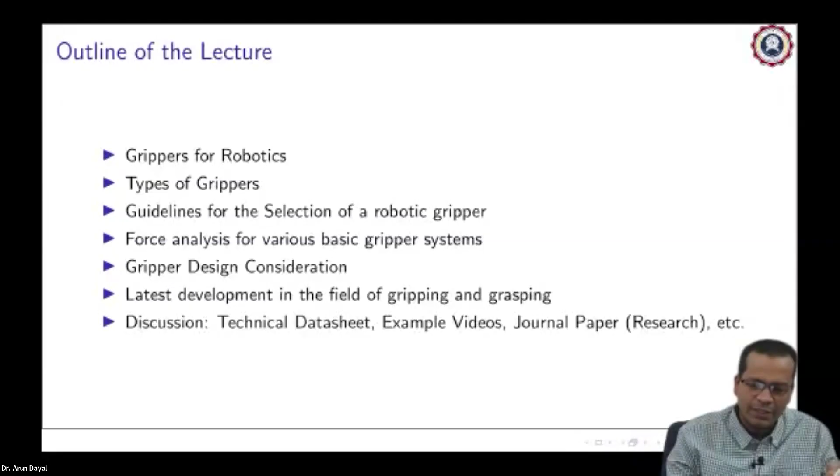Two things are there, we'll come to know very soon. Discussion on technical data sheets, I'll show some example videos, quite a lot of videos rather, and journal papers, a few research papers I'll discuss, so as to help new researchers who want to venture into this kind of robotics.

So as such, what is a gripper? A gripper is a device that enables holding an object that needs to be manipulated. Manipulated here means you want to transfer it from one place to another.

So that is the reason you want to hold it first of all, so that it can be manipulated. So how to hold it? Just like our arm, you have a dexterous gripper at the end, your palm, your fingers, that help you to grip something, to hold something. So your arm terminates with the end effector tool that is commonly known as gripper if it is used to hold an object. So we'll quickly start with a small video here.

So before that, yes, yeah, just a sec.

So you just watch this video, what it is trying to say. This is a video by one of the manufacturers, that is SMC, a Japanese company. In India also it manufactures grippers, a few of its types, in Noida. So just watch this video, that is for a few minutes, yes, two or three minutes.

You see it is a grip, ensures precision and a tight grip, high repeatability gripping force. What it is basically, it is a two-fingered gripper with repeatability 0.01 mm.

So just look at the key terms here. Before we could elaborate upon how to go for gripper theoretically, just watch this video carefully. This is the first video I would like to show because it covers widely all various types of gripper. So that is the reason, what precision means here, what is repeatability here. Repeatability is 0.01 mm. It is not the robot's end effector repeatability.

What is repeatability? Anyone, if you can stress upon that, what is repeatability here? Anyone? It should be two-way communication, as I told you.

No? Okay, I'll elaborate. So let's say if it is an end effector arm, what happens? Every time you touch upon something, you go repeatedly, multiple visits to the same site. Every time you reach there with some perturbations. So maximum amount of perturbations from the commanded position. So the sphere which contains all the dots which you have touched upon for a given commanded position, the maximum size that can contain all the dots is its repeatability.

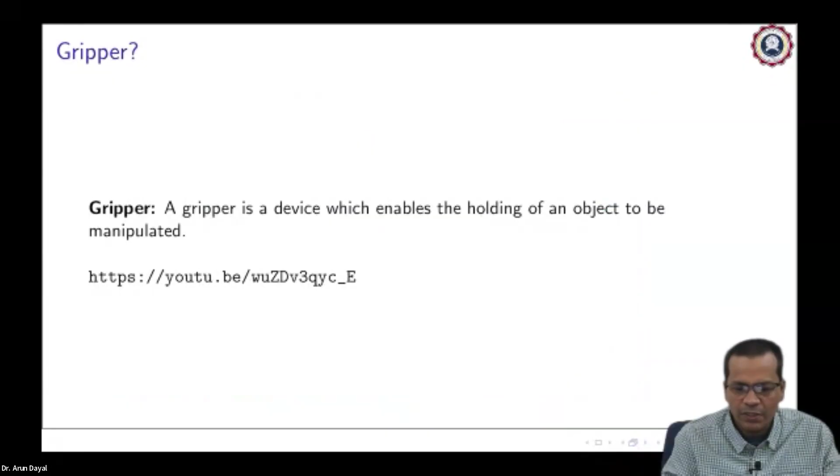Let me stress upon this point. If it is a circular object of this kind, you can have a gripper of this shape, with some radius for this surface. This surface will have some kind of radius, and this has a radius also. This is R1, this is R2. If there is a bit of difference between them, there has to be some, but that should ensure maximum amount of gripping surface so as to avoid any kind of slipping.

Got it? So it is a cylindrical cut. So if the radius is of multiple sizes, you have cylinders of this size, cylinders of that size, so you have multiple size cylinders.

In that case, what we should do here, hope you are here with me, so continue listening. Create noise, I like noise also, and that makes me feel that you are alive.

So this is a cylindrical surface. It can establish a good amount of surface contact without slipping. But this could be a wedge kind of gripper on both sides. What would be the benefit of this?

Now you can hold cylinders of multiple sizes. Because both wedges are of the same type and size, it will be self-centered also. When you approach from both sides equally, upon full closure on the cylindrical surface, the center line will not vary.

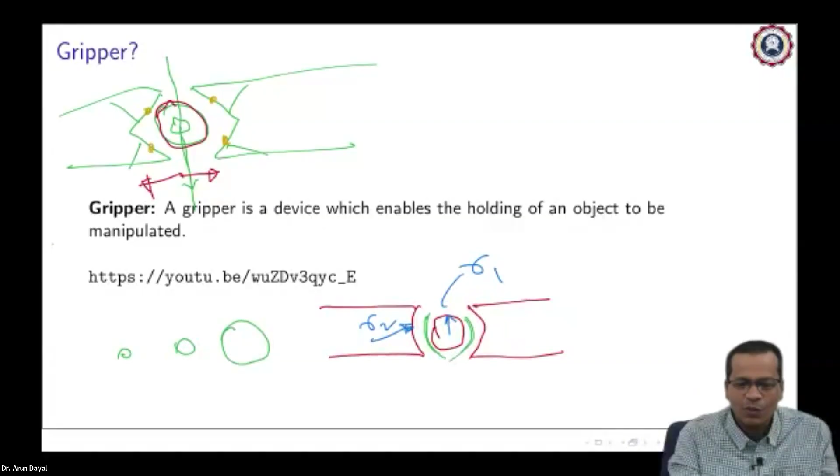Is it okay to have 4-point contact for a circle? What would be the problem having this kind of 4-point contact? A circle can be defined with just 3 points. The fourth one is redundant. So if it is not precisely placed, it goes off the surface and creates some spacing.

There will be some space left over here. This will cause movement of your cylinder. So 4-point contact is redundant, but having a wedge on both sides ensures it is self-centered, meaning the axis will not shift. Let me wipe off a bit to make some space. So that is the problem with 4-finger, 4-point contact, but it ensures self-centering.

Now what else could be done? One of the fingers can be flat, the other one can be like this. So upon holding any cylindrical object, it will create 3-point contact: one here, one here, one here. This will precisely hold a cylinder.

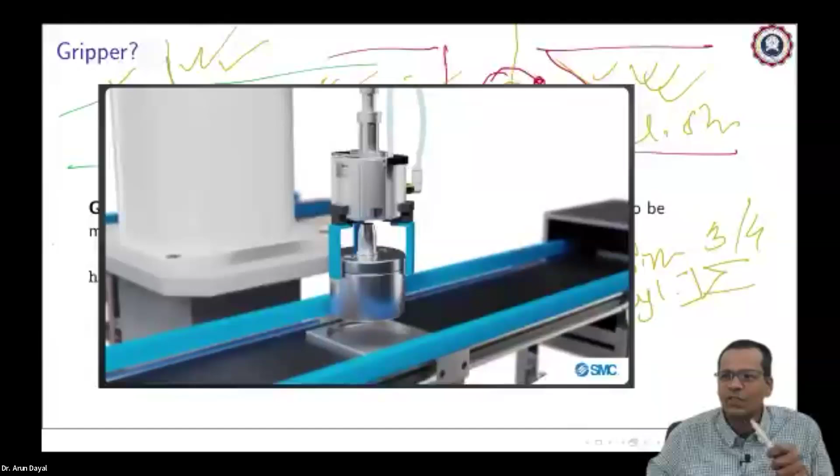So a 3 fingered gripper ensures self centering. If you require a strictly self centering grasp, you use this kind of gripping, that is 3 fingered gripping. So this ensures that.

So you have various kinds, right. Common use, this surface with flat fingered gripper with 2 point, 3 point, 4 point, or maybe rubbery surface or a cylindrical surface, 2 point gripper.

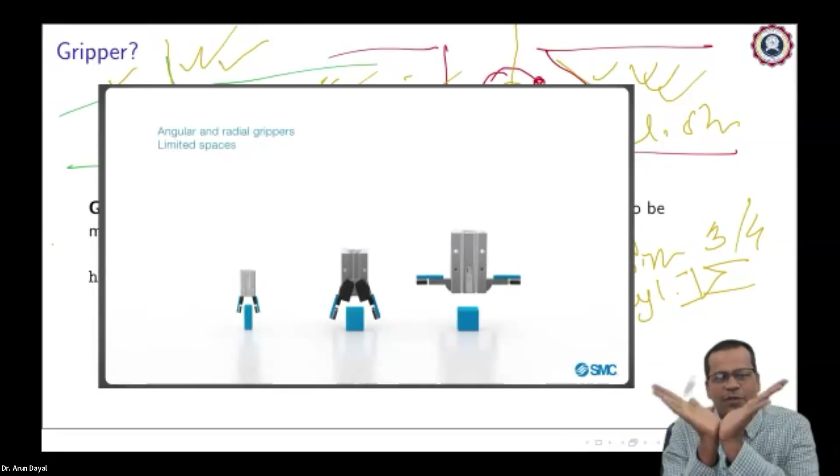And then you have an angular gripper for limited space. Normally, if it is a fork kind of gripper, you have long prongs, just like a tongue depressor which doctors or surgeons have. You need a wide, long space to hold any object. In case you don't have much space for that, you can have this fin kind, and grab it like this. So this is angular gripper or radial gripper for limited space, which can grip like this.

You got it? What it did? I have just repeated it.

Now another type, that is magnetic gripper. Obviously this is only valid for ferromagnetic pieces. So uneven surface or any kind of surface can be held firmly.

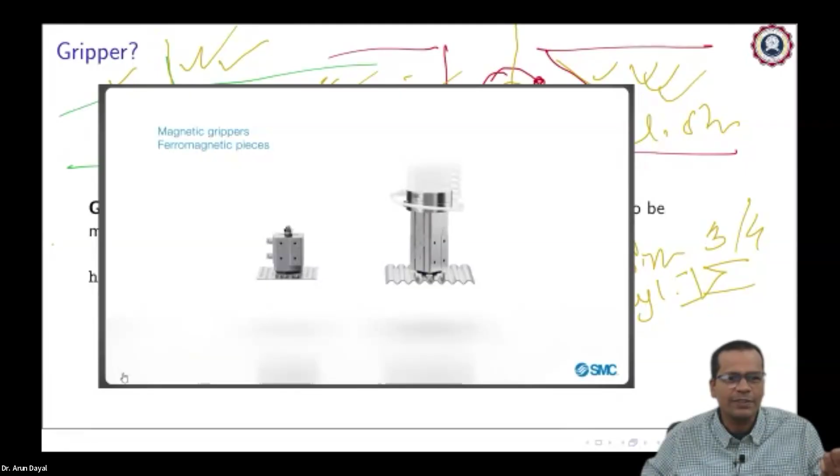Electromagnetic gripper, this is quite obvious. Adapt to special environments, right? Some special kind of gripper, dust and water resistance. So this is also to be considered. We'll discuss in detail how much ingress protection in terms of dust and water it should allow.

There are grippers for clean rooms. What is a clean room? Where ICs chips are assembled, even for space station precise assembly spaces, you need a clean room. It is not clean literally, it is actually the number of particles in 1 foot cube. It can be class 100, it can be class 1000 clean room. So that is mostly used for the electronic industry, right? That is clean room. You can Google around and find it out. It is for that reason it cannot spread any kind of particle in the air. It is very sensitive to that. So it is used in electronic handling.

There are grippers for special purposes like battery manufacturing, which is free of copper, nickel and zinc.

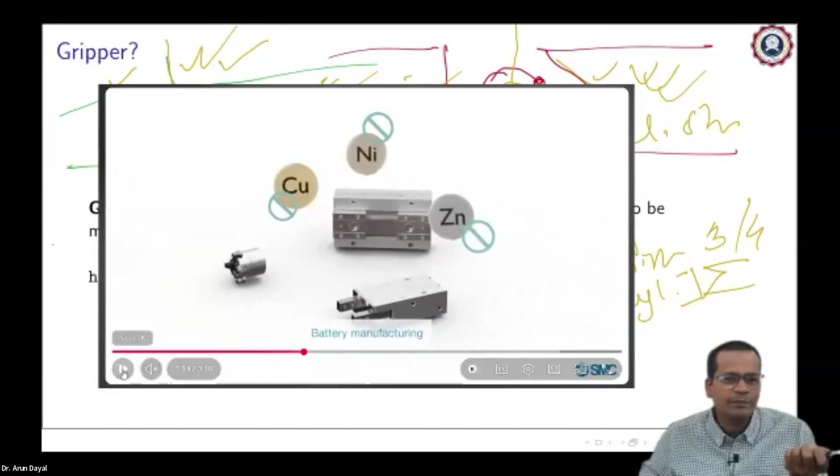Chip handling, you see, pick and place. This is a typical pick and place task. This is known as end of arm tooling.

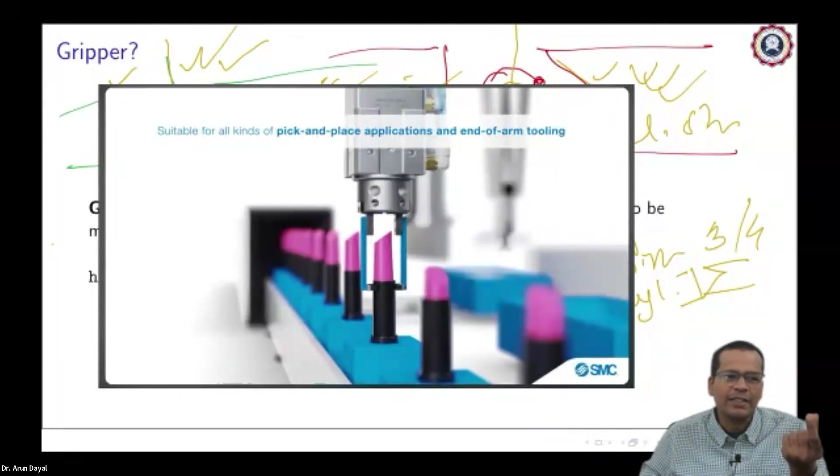These are grippers which can hold from both sides as well as rotate about its axis. That means it has 2 degrees of freedom. First is the gripping direction, lateral, both fingers are not independent. Although it looks like 2 independent degrees of freedom on each finger, they are actually clubbed together, so that is 1 degree of freedom. The other is axial degree of freedom, axis of rotation, giving 2 degrees of freedom. You see, it can rotate, it can hold.

This can hold from outside. It looks like a pneumatic gripper. I'll tell you what is there inside later on.

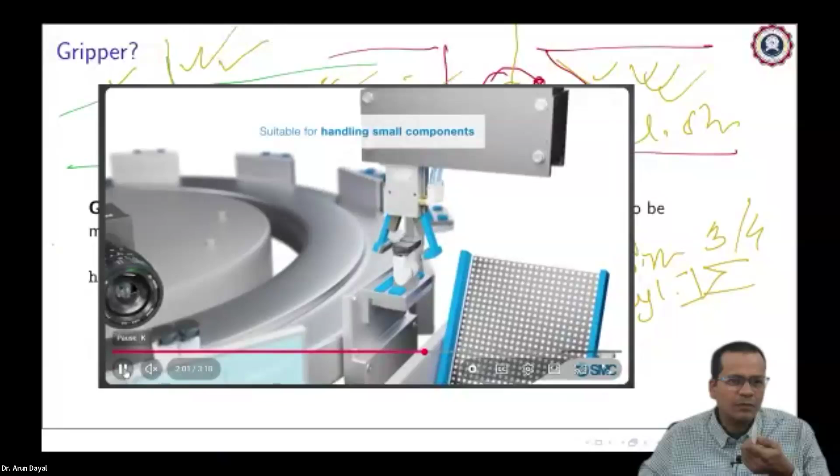This is a multiple fingered gripper which can hold a pair of things together. Angular gripper, parallel gripper, you could see different usages of that.

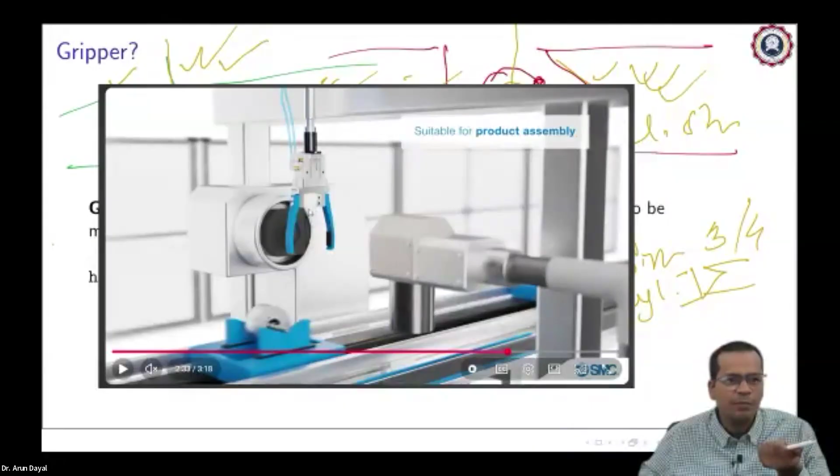All the gripper fingers are specially designed, you see. You can have the same robot arm with multiple types of grippers. You saw in the next one, it rotates and a different type of finger comes forward.

Tool changer, actually it is changing the tool. So if you go to the assembly line, you will find multiple types of grippers on the same assembly line.

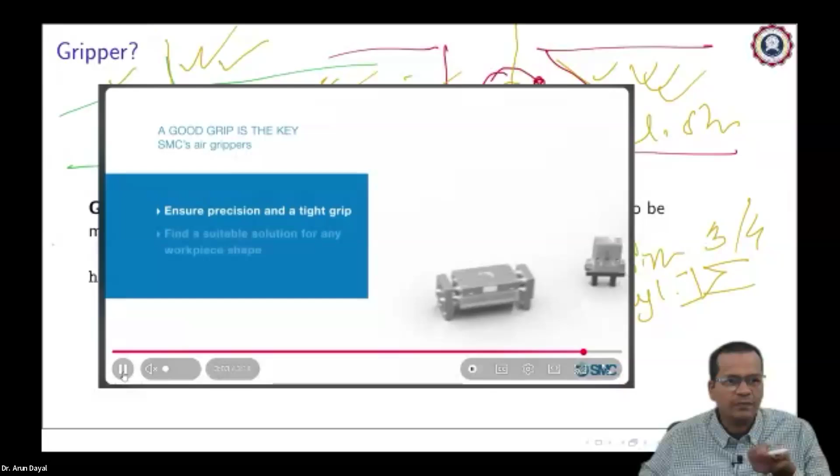So you saw many examples. Let us stop this video here and continue further. Hope you got the idea of what we are going to discuss now. So now, a parallel gripper, based on how different types are defined here, based on the primary motion of the gripper jaw. Let me turn on one small example once again.

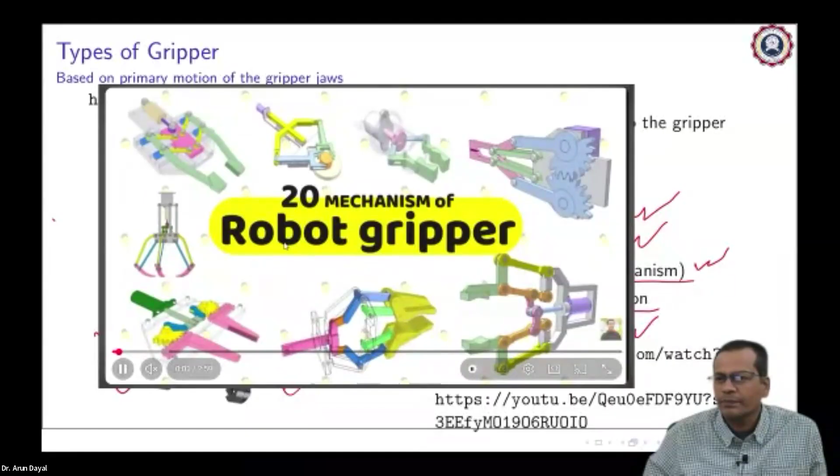This is a 4-bar mechanism. Inside you see there is a 4-bar linkage and one of the links is actuated, the blue colored one, using a piston. So it is just 1 degree of freedom. If you calculate the degree of freedom of a 4-bar mechanism, it is 1. So now two 4-bar mechanisms are paired here, both connected with a single piston, this pink one. So overall this gripper is a one DOF system.

So it goes like this. The problem here I find is that when it is gripping, it is also coming a bit forward, so you have to hold a particular distance while holding something kept on the table. If you try to grab it, it also comes a bit forward, it may hit the table. So you have to be a bit careful about this. It is coming forward, you see.

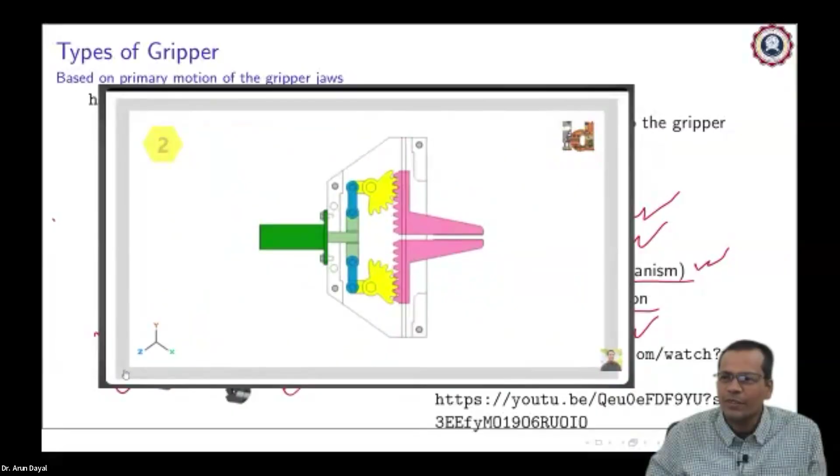Second type, you see inside it is a pinion, rack and pinion. Again it is 1 degree of freedom, both jaws move evenly to both sides. This is a wedge kind of mechanism. Again it comes back to its position using a spring-loaded mechanism and is pushed outward using the wedge. All these are one-DOF systems.

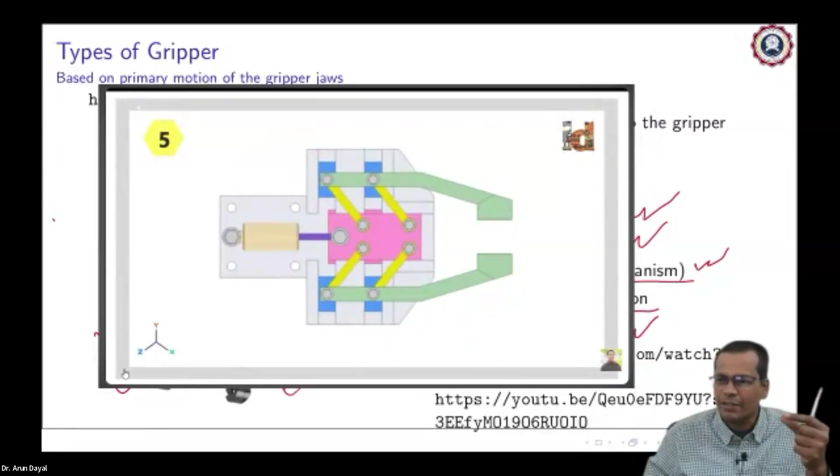There are many approaches. In this one you see when the fingers move, they don't come forward or go backward. It traverses only in one direction.

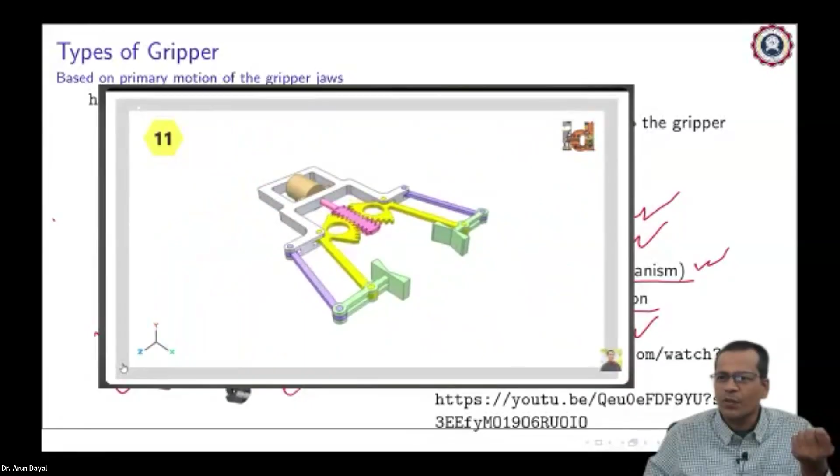Okay, so this is another mechanism. You see all these are intuitive, quite intuitive. Just keep watching the animation. Mostly they have a 4-bar mechanism inside, or a rack and pinion type. So if you have to design, you may pick up one of them and go ahead.

This linear motion can be done in different ways, but you see the pink colored one is moving. Essentially this can be moved using an electromagnet, hydraulic force, or pneumatic force. Each one has their own advantages and disadvantages, which we will discuss in detail.

You see it is aligning itself. You saw just now when the grippers held at both wedges, the cylinder moved a bit and it came to the center line. This is interesting, it holds from a different direction altogether.

Movement can be done using a solenoid. A solenoid is used in your ding-dong doorbell. A pneumatic syringe can also be used.

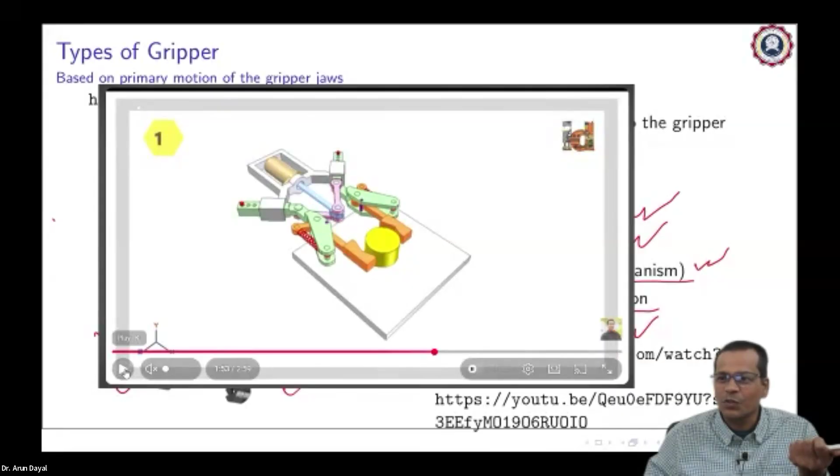This looks quite complex, but yes, it is a 4-finger or 3-fingered one. This is 5 - you can keep on expanding it. You can hold it, you can envelop it from multiple directions. So objects of random shapes can be held using this.

This is quite complex, unnecessarily though. This is all because they want it to be self-centering. Got it?

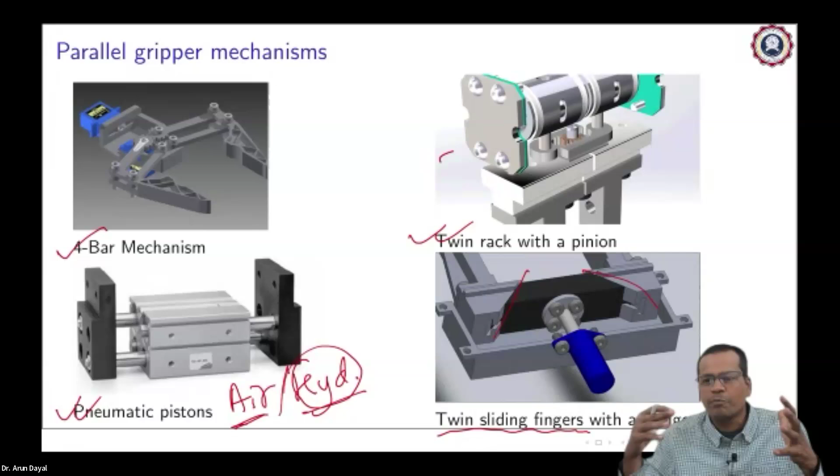And you see, you can have twin sliding fingers with a wedge kind of mechanism. This was wedge surface, this is pinion. So four major kinds of mechanisms you saw, right? Moving ahead, you also saw the angular gripper. I'll just quickly go through this once again.

Okay, so again look very carefully at what I want to show you here. So this is a 180-degree air gripper. 180-degree means the gripper will open up to 180 degrees, so it completely clears off the surface where it is attacking.

So outside it looks like this. This is from SMC, Japanese company. Finger opening port and a closing port. So if you are pushing in air, basically you are moving the inside piston to one direction, pushing it from the other side, it takes off - so extension and retraction is happening inside.

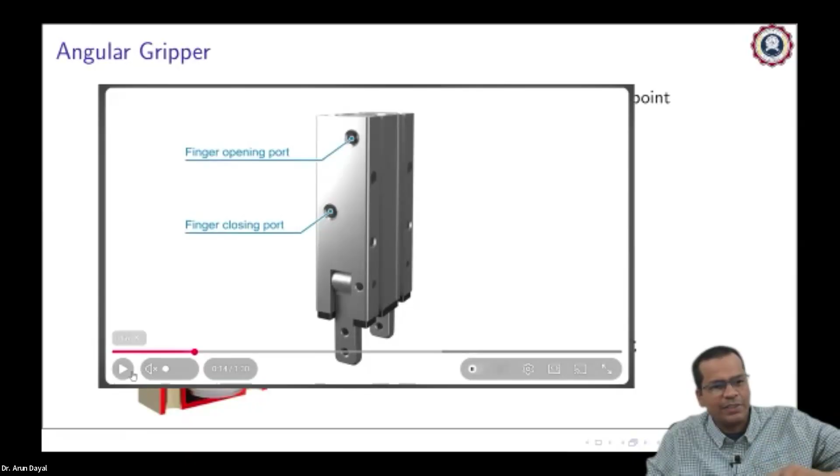So what is there inside? It will require a 5x2 way or 4x2 way valve, pneumatic valve to operate. If somebody is from automation can understand it. So you have to push air and vent out the other one, push from the other side, vent from the other side. So that is how it works. So yes, you will understand - you see inside it has a piston, a joint and two fingers.

Needle roller, that is to create it smooth without getting entangled, right? When it is pushed, it moves like this.

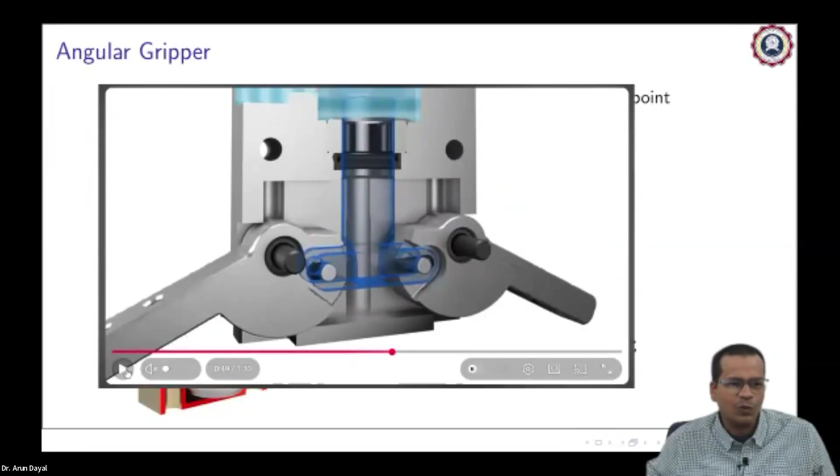The mechanism is such that it is irreversible also. Piston can drive the finger, but fingers cannot drive back with the same amount of force. So it gets self-locked when it is closed - if it is closed, you cannot move it back. The mechanism is such that you cannot push the piston back. If you try to pull out the fingers manually, it won't come out. Only the piston can move it - once it is closed, fingers cannot open it up. That is the problem, okay.

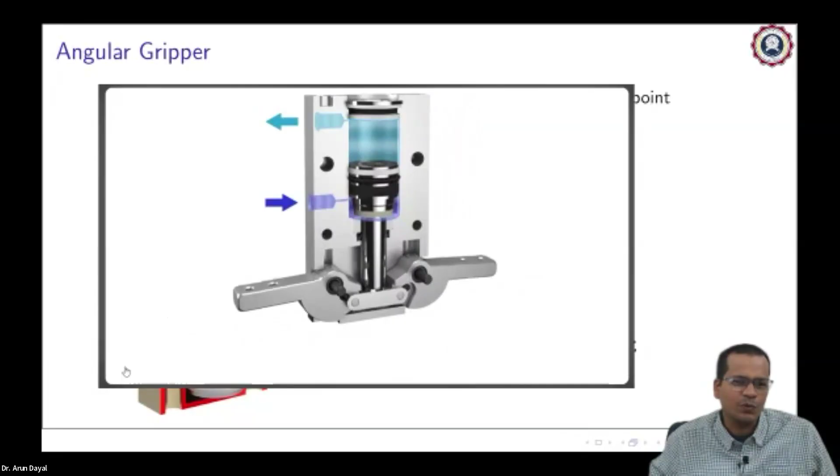So that is intentionally done. Air from bottom and top can drive it open and close. So that is the angular gripper - this is an interesting mechanism, right?

So you can have extension to this finger to hold different kinds of object. Fingers extension can be done. Extension can be flat, it can be wedge, it can be circular shaped. Two finger, quite adaptable.

Okay, so now coming back to my slide. So this was the one. You see jaws are open and closed around a central pivot. Sweeping and arcing motion is done. Jaw needs to move up and out of the way in a limited space, so it is for quite compact spaces.

So second one tells you it was a kind of toggle gripper, the video that you saw now, toggle gripper. Pivot of the joint movement acts as an over-centered toggle lock, okay, provides high grip force and power to weight ratio. Once it is closed, it cannot be opened of its own until unless you apply a reverse air pressure, right?

So actuation can be done using electrical solenoids or pneumatic piston. It can also be hydraulic, but we do avoid that. We don't want that to happen, right? So maybe again I can come back to a small video.

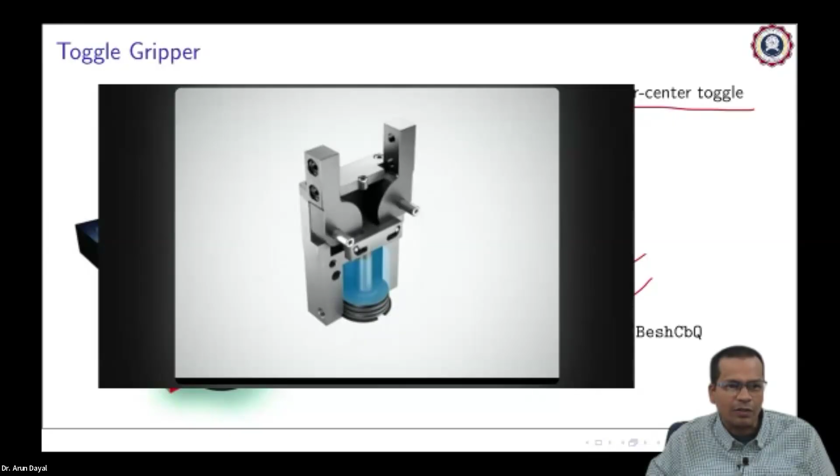Watch this carefully. So how is it working? Actually, it is getting toggle locked. It opens up, but it is locked at either position. So once it is closed, you can make that object travel to long distance without risking that object coming out of its place, right?

It shows the complete assembly. You can have an adapter to fit it to the robot. Finger adapter can also be there. Wedge type of adapter is shown here, twin wedge. Finger adapter for the robot. So these are the pneumatic connections which are there, port A and port B. These are the flow controls, to control the speed at which it opens up or closes.

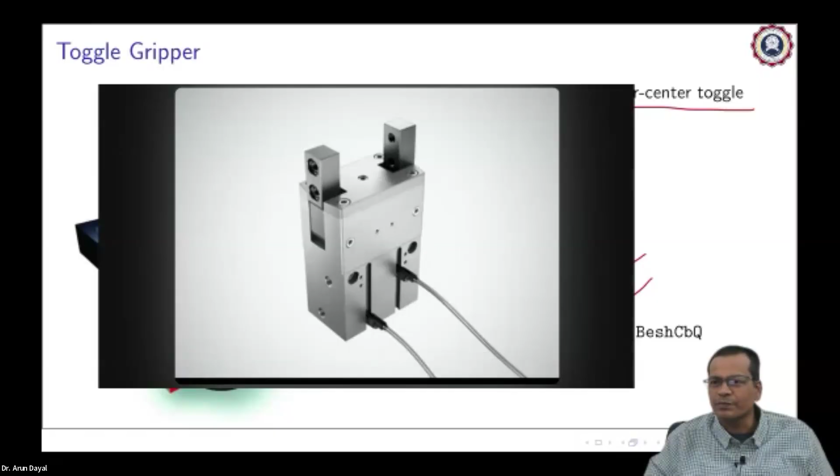What are these now? Any guesses? What are these? Just now it is fitted here. What are these? Any idea?

Sir, pressure sensor? Not exactly pressure sensor. They are position sensors, right? They are sensors that detect the state of the gripper, if it is open or it is closed. Essentially, they are Hall effect sensor, Hall effect magnetic sensor.

So what happens? Inside you saw there is a piston. If the piston is over here, you can see my cursor, so this will get activated. If the piston is down below, this sensor will get activated. So depending on the inside position, the piston has a magnet fitted inside. That magnetic field comes outside the casing and energizes this Hall sensor. So either it is open or closed.

So the state of the gripper, sir, is kind of reed switches? Not reed, reed switch and Hall switch is different. Reed switch has got two wires, it is just a magnetic contact which happens due to magnetic field. But in case of Hall, it is a kind of material which acts like a transistor. You have supply and you have an output. Output is activated when it senses any magnetic field. So it works a little differently. Got it? So Hall sensor, again, it is a magnetic field that energizes it. It is mostly indium arsenide, gallium arsenide or kind of materials which have that property. So that is Hall sensor.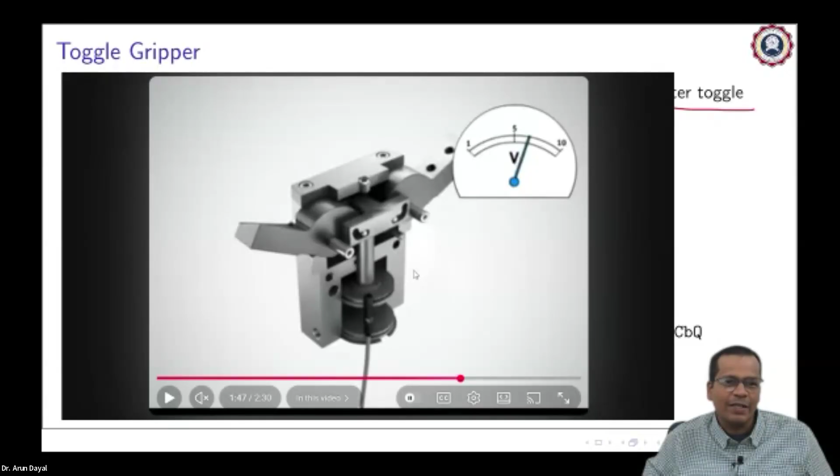Okay, so you see the variable voltage you saw, no? So with just one Hall sensor, it is good. You can just measure the voltage instead of working in threshold kind of high or low. You can have a variable voltage to understand the percentage it is open or closed based on the Hall sensor voltage. Hall sensors are very inexpensive, some 10, 12 rupees you can get on Amazon also. You can use that to understand your gripper state also.

These are some external attachments for limit switch. You can have a limit switch to show the state of the gripper finger. These are limit switches, or sometimes proximity switches. This was proximity, not limit switch, so there is no physical contact and no wearing will happen. So if this lever comes in front of the proximity switch, it tells that this finger is open. Both the finger states can be independently reported. There are multiple ways to use it.

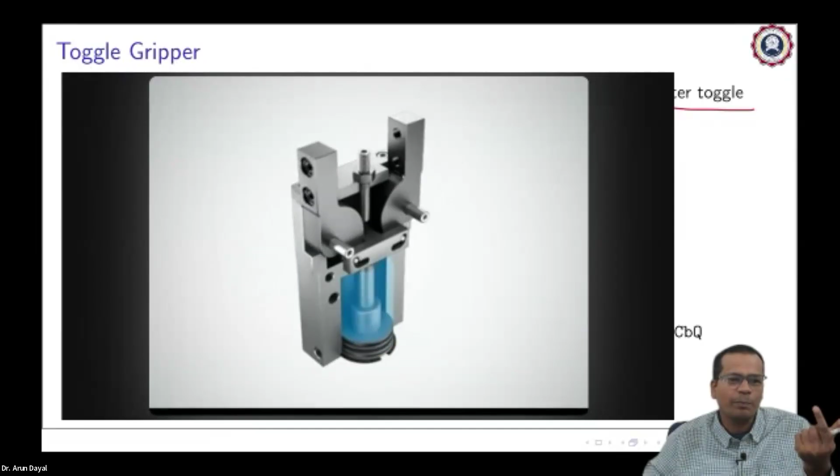So this is manual opening and closing. If at all it gets locked, this special system is there so as to manually open or close. So many features are there. You can limit the position, how much to open. This is the limit you can put. You can attach an external bolt which essentially controls how much it will open. That can be limited, or manual opening can be done using that hole.

This is Festo one. In the figure that I showed earlier was an SMC one. Got it? Okay, hope you got it now. Let us move ahead then.

So this is a type of arrangement that you saw, external arrangements which are there to detect the state of the switch, the state of the gripper fingers. So that is toggle gripper.

Next, based on number of gripping fingers you can classify. This is self-centric or concentric self-aligning kind of gripper, three fingered. Each one of them has this kind of wedge shape. That is to envelop a circular kind of object. If it is a circular object, it holds like this. Got it? So that is there.

Individually servoed, it has many degrees of freedom. This is a kind of near-biomimic hand, from Schunk, but Robotiq also makes it. These are very, very expensive. Until unless it is required, you should not use it. They are literally very expensive. I have in my lab a three fingered gripper, each is something around 15 lakhs, from Robotiq. I am using it for a dual arm manipulator, where each finger is servoed and you get feedback, it detects slip, and it has many features.

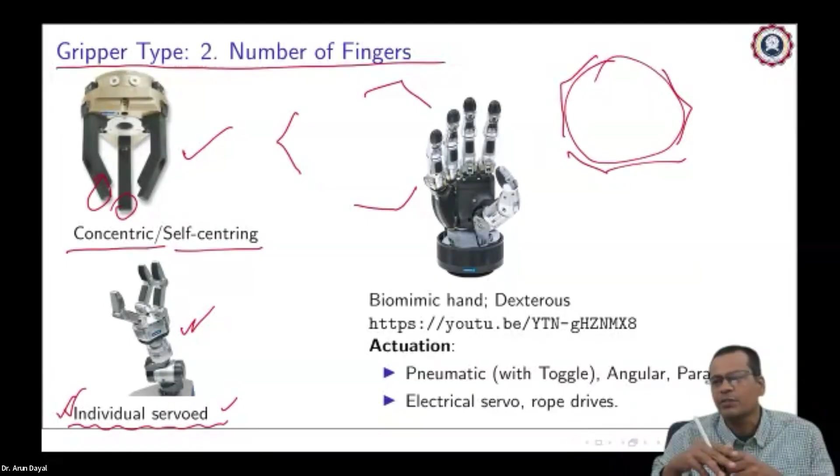Until unless it is required, you should not use it. In industry, just two fingers is enough for a lot of purposes, or maybe at most three fingered simultaneous motion, not independently servoed. This is a kind of biomimic hand which is very, very dexterous. I will show you again a small video here, how do they look like when it operates.

So it is very much like our own hand now. Each finger can be moved, it can envelop, it can pinch grasp, it can hold it, envelop it. So multiple ways it can do the grasping.

It is used for maybe a robot may or may not look like human, you know that, right. So until unless you need it for places like child care, elderly care, or maybe in space applications where you need to look like human too, to understand the psychology of a person. In medical, normally we prefer having a robot which should look like human also, otherwise they may get traumatized or something like that. You cannot afford to look like a typical industrial robot arm when it is doing an eye surgery. Understood? Even though doctors are around, you don't prefer to have it look like that. So that is the reason. Until unless you need to look like human, or there is some special advantage you are getting, otherwise they are exorbitantly costly.

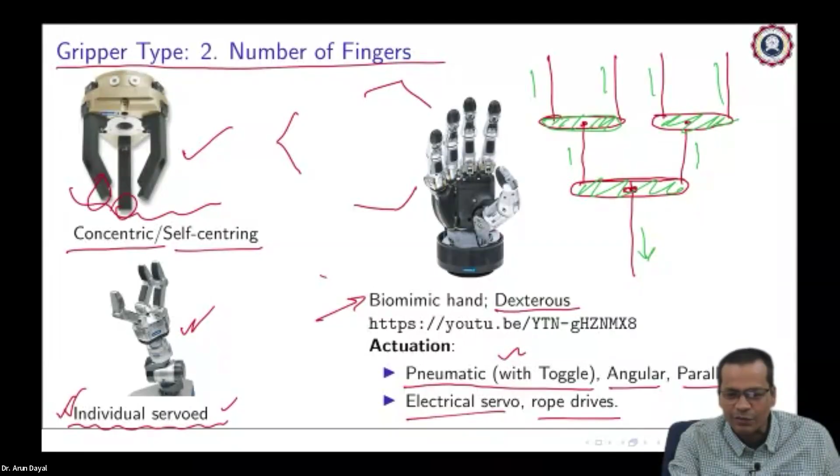So if you pull this rope, what will happen? It will pull this, it will pull this, right? Again in turn, it will pull this, pull this, pull this, and pull this. So let us say you have these 4 fingers here. If you pull just one rope, all the fingers will be pulled. Is it not? Yes or no?

Yes or no? Anyone? If you haven't understood it, let me come back once again. So what I am doing is I am pulling this rope downward.

This is a link, this is a link. It is pulling this link using these 2 ropes, which in turn is pulling all 4 ropes, closing this. So if there is resistance in any one finger, if any one finger is constrained and not allowed to move, what will happen? Others will continue to move, right? So this creates a kind of enveloping grasp.

So using just one rope, you can create a mechanism which can envelop itself. When you grab something, it takes the shape of the object. You can hold a rectangular object, or a cylindrical object. So constraints are put on the fingers in different ways.

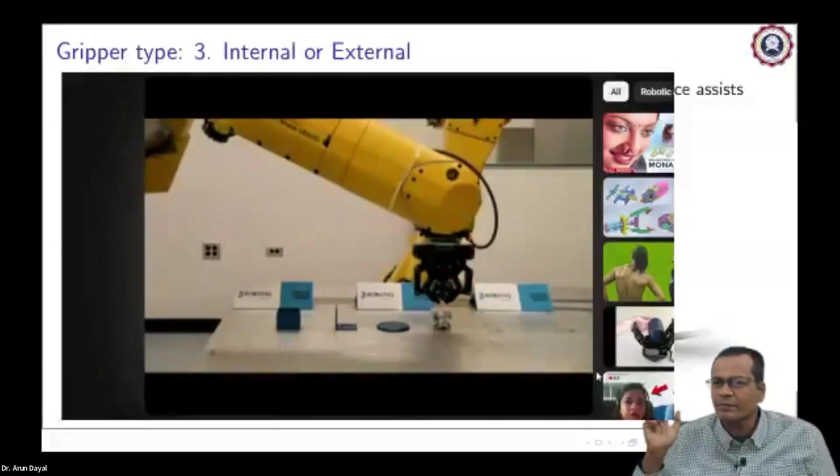This is a kind of gripper which can hold objects of various sizes, you see. From internal it is able to hold it. From outside also it can hold. It can hold like this, squeeze it, right?

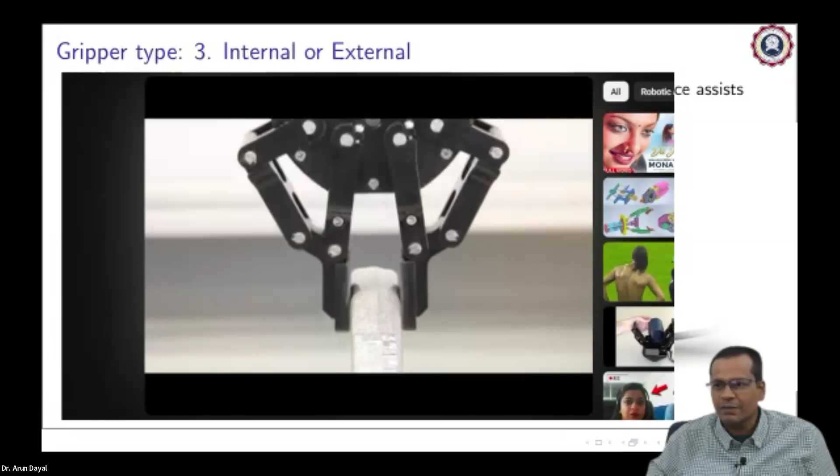It can do an enveloping grasp so that while moving it won't fly off, right? So this is a kind of versatile finger design which can hold objects of various types, again by Robotiq, which is very expensive. You see it can envelop.

So that common closing force is the most common type of grasping, external grasping. We hardly hold objects from inside. Any place that you see, you need to hold from inside sometimes.

Let's say you want to hold a cooker, a pressure cooker. You can hold it from inside also, or you want to move it from one place to other, holding it from outside.

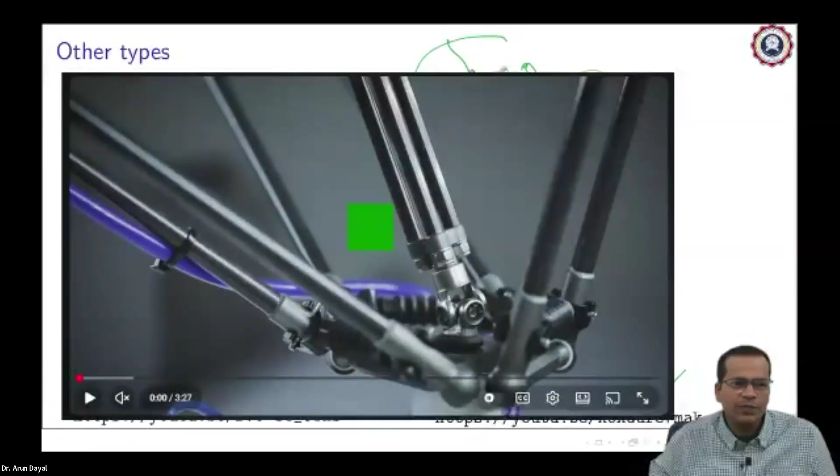So this is a biomimetic kind of gripper. Inside is compressed air that goes into all four bellows. The bellows are shaped such that if you put in compressed air from the top, it changes its shape inward and holds the object. That is the principle behind it. Again, it is patented. It is quite soft in gripping. This is a soft gripper.

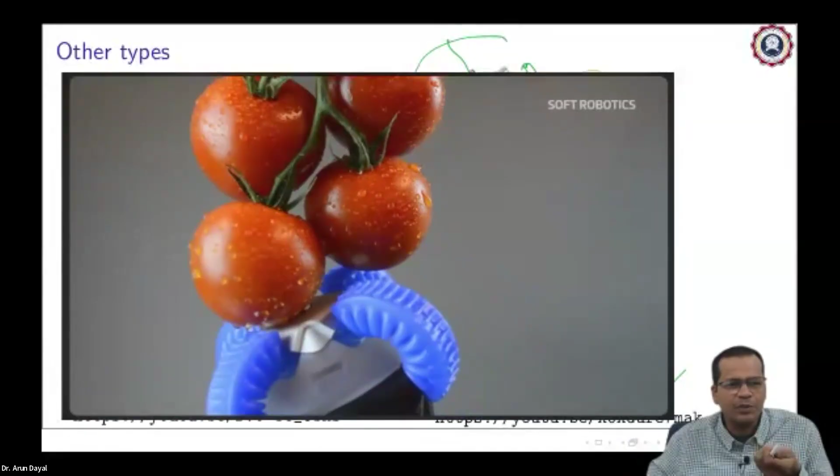Current day research is on this kind of gripper only. It takes multiple shapes. It works on pneumatics, so they are naturally cushioned. You can attach 3 finger, 4 finger, multiple shapes, soft objects can be gripped. It takes the shape, it can do an enveloping grasp, it can hold an egg or anything.

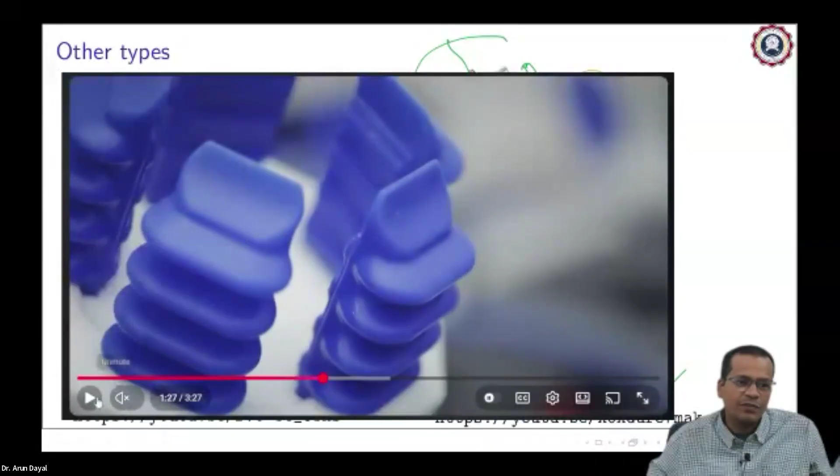So nowadays, since you have 3D printers in your labs, you can 3D print and create one such bellow and try to push in compressed air to get this deformation and create your own fingers. This is quite an easy project that you can give to your students, and it is very helpful to create your own soft gripper. Quite interesting, no? It is fitted at the end of a delta robot, and soft objects are getting held.

Okay, so now let us come back to our slide here. For gripper drives, you can use pneumatics for smaller units with quick assembly; pneumatic systems are very fast, you can push in a lot of air in no time. They are literally faster than a screw drive mechanism, or rack and pinion, or 4-bar mechanism. High cycle rates, few parts get worn out, and they can be easily maintained. Electrical motors can be used for high accuracy and repeatability, and take less floor space. Pneumatic systems need a compressor.

Pneumatic systems need a compressor, but this one does not. You can directly take supply from any wall mount. They are low cost, easy maintenance, electrical motors, and grippers can be very big.

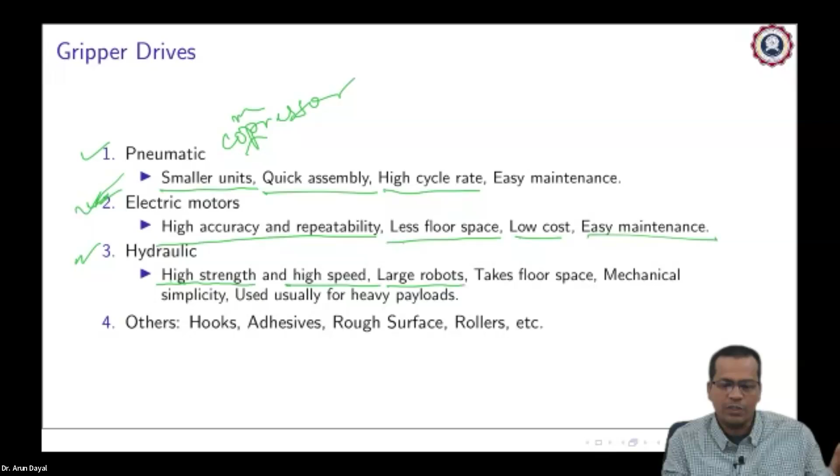Hydraulic is used only when you need high strength and high speed, because while moving an object, a huge amount of centrifugal force comes up, so the object may fly away. To avoid that, you need high gripping force, so in case of large robots, mostly we use hydraulic grippers. It takes floor space, mechanical simplicity is there, but maintenance is more, and it can create messy surfaces due to its oily nature. It's usually used with heavy payloads.

Other various kinds could be your hook. Hooks can be used as a gripper also. You need not have any kind of mechanism. You just have a hook, you hook it and take it somewhere, if that object allows doing that.

You can have adhesives, which are used like a gripper. You can have a rough surface also, you just slide it and put it into some bin. From the conveyor you can drag off. You can have rollers, pushing arrangements, and many other types which don't have many mechanisms, and still it can be called a gripping device or end of arm tooling.

Now, next are various considerations you need to do while you design a gripper. Custom finger shapes: you can have a shape like this, a gripper shape, or just a rectangular flat surface with some kind of rubbery surface. So there are many ways, and each has its own application, advantages and disadvantages.

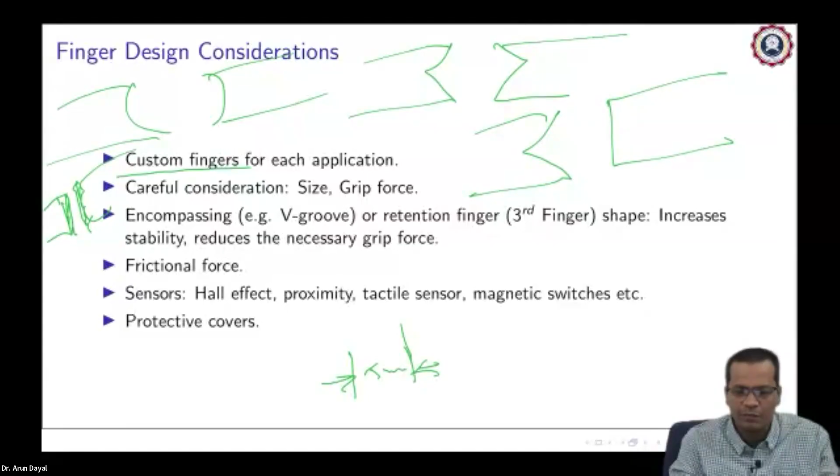Something that can open, you can create your own range. Your system allows moving by 5 mm displacement of the finger, so you can have an attachment on this finger to make it a little more range. You can create a finger shape on the top, so if this goes from 0 to 5, this can go from 5 to 10. Displacement is 5 mm, but it can be made wider using a finger attachment, so it can go 5 to 10, 10 to 15, 15 to 20, with just a 5 mm actuator. That is what you can have: external attachments on various size gripping force units.

Consideration: gripping force, how much air pressure to use, how much electrical current should flow, what should be the mechanism, should there be a toggle locking arrangement, or an enveloping grasp. Encompassing means it envelops from outside, some retention finger, a third finger is required. Shape increases stability and reduces the necessary gripping force; if you can envelop it, you can handle with less gripping force.

You can have friction force as well. There are various sensors available. You can have a Hall effect sensor to know the state of your fingers, proximity sensors, and tactile sensors to detect any kind of slipping. Mind it, they are very expensive. You can have magnetic switches also, and some protective covers.

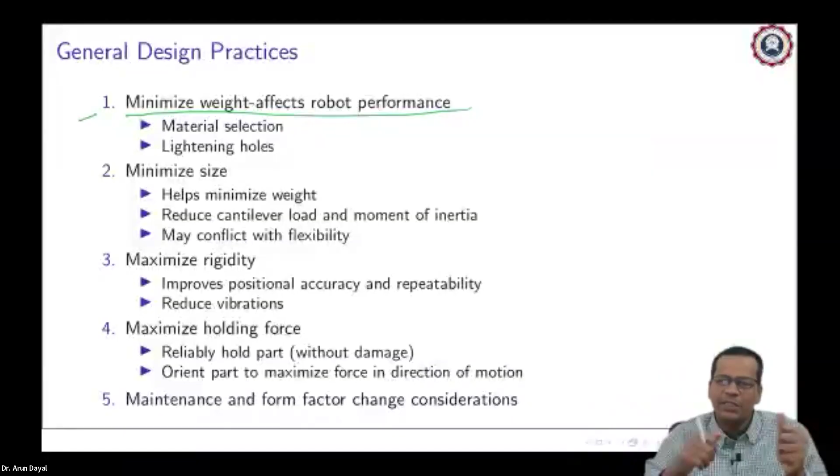Moreover, if your gripper is widespread, it has more moment of inertia, so that will affect the robot's performance. Dynamic performance will change, so you may have to do some kind of dynamic tuning of your robot. Load characteristics of the gripper should be taken care of while doing any precise task.

So that essentially focuses us now on the kind of material selection. You may have some kind of lightening - your finger may have some holes inside to make it lighter while still being bigger. So that is, lightening holes can be made. Material is to be selected so as to make it lighter, and the shape should be done in such a manner so as to have less moment of inertia. So these are a few things.

Minimize the size, that helps definitely to minimize the weight of the gripper. Reduce cantilever load - if your fingers are very long, it will create cantilever load as well as moment of inertia. So if the fingers are very long, you need a huge amount of gripping force to hold the same object.

It definitely conflicts with the flexibility. If the fingers are long, they are also a bit more flexible, so more deformation can happen if the fingers are long. So minimize the size. Then comes maximize rigidity so as to have more positional accuracy and repeatability. These are again related to performance characteristics.

ISO 9283 is the ISO standard which governs the repeatability of a robot. If you have fitted a faulty gripper, it affects the repeatability also, so it reduces the vibration effect.

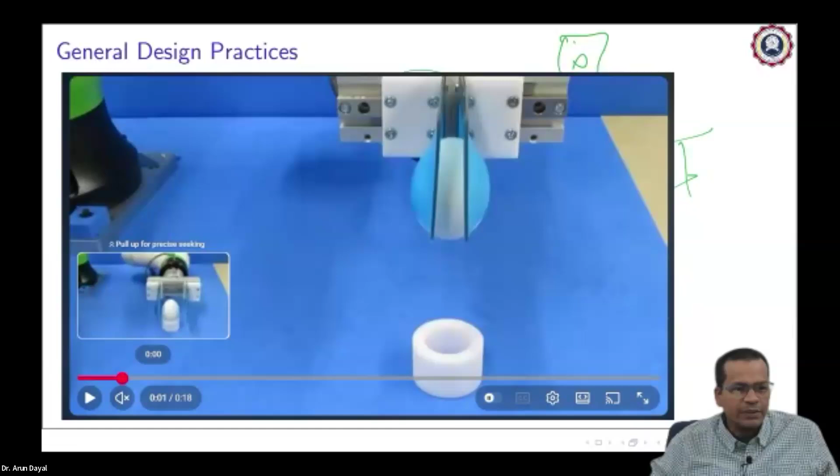Yeah, this one. Just see this video. It is a parallel fingered gripper, but it can hold an egg. You see?

It is made up of a material like a balloon or something, a diaphragm kind of material. So it takes the shape of an egg, and even though you have a tough surface for the gripper itself, it is able to do this.

So it can reliably hold the part without damaging it. So you have to maximize the holding force, and at the same time, while it is holding, it should not affect the reliability of the grasp.

Orient part to maximize force in the direction of motion. Now you saw you were able to reorient the egg, and still it can hold it reliably.

Maintenance and form factor change consideration. The gripper should be such that it is easy to maintain, and should allow the robot to be maintained as well in an easy manner. Form factor - these are a few things which are design considerations you have to check.

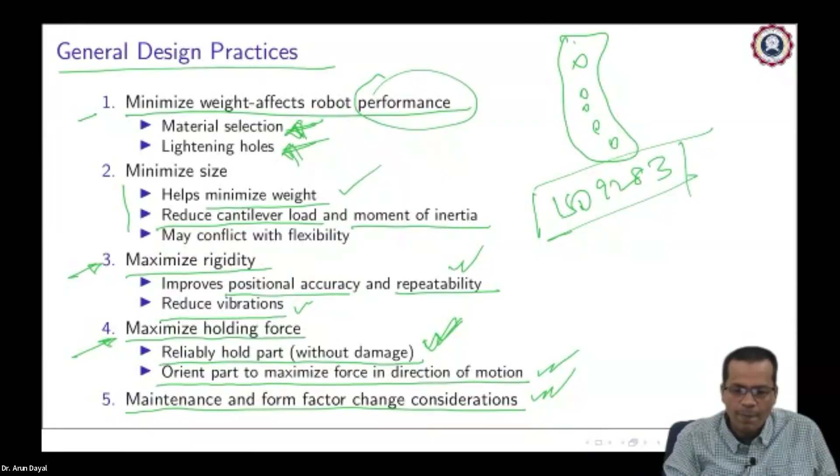There are various ways you have to select the gripper. Workpiece analysis - the object which is to be handled, and the weight of the object, is to be taken care of.

The process you have to pick and place from and on the conveyor - that is very easy, it is only vertical motion. But when you have to move in a circular way, your gripper is oriented so that the object may fly off, it can come out of the gripper. Although you are handling a 5 kg payload capacity gripper holding only 2 kg, while moving it creates a centrifugal force which is more than 5 kg, so it may come out of the gripper. So process is very important.

While moving, the dynamic forces are quite different. Friction also has got different effects in different directions, depending on the shape and material of the gripper fingers. So design consideration, something you have considered earlier - finger design, the length, it cannot create a cantilever, or it should not be flexible, it can create a cradle or a capture thing, it should be repeatable, gripper stroke, etc.

Type of gripper can be pneumatic, electro-pneumatic or electrical gripper. Depending on that you have to check what issues are there - clean room, corrosive environment, high temperature, radiation, waterproofing required, air quality, lubrication or non-lube, IP rating, ingress protection rating - all these are issues which are to be taken care of.

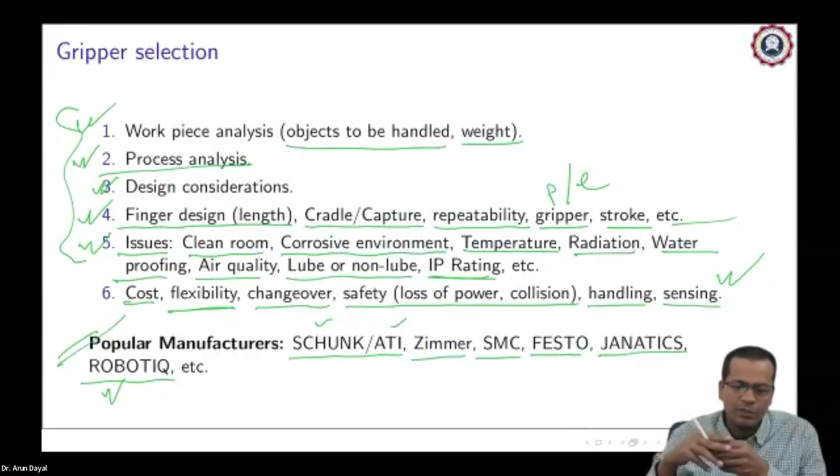So popular industrial gripper manufacturers, industry wise, are Schunk; ATI in India is dealt by Schunk only, although they are two different companies. Zimmer is popular in India. SMC Japan makes grippers in India also. Festo is a good manufacturer. Janatics is an Indian Coimbatore-based company doing good work. Robotiq is quite expensive, but has quite special kinds of grippers. Apart from this, there are quite a lot of grippers in the market - you can always browse through, but these are some of the standard makes.

So let us go through maybe one or two data sheets now - video catalog, technical data sheet, some journal papers. We have seen plenty of videos. I would like to show one of the technical data sheets now, covering all the parameters which are there while choosing a gripper.

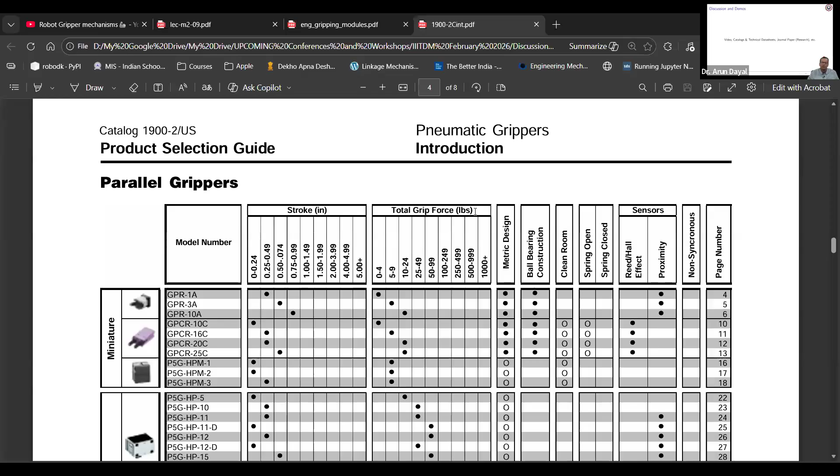Then you have total gripping force in pounds - Parker uses pounds, but it may be SI system also for a few grippers. So gripping force, metric design, any kind of feedback is given in terms of metric units. Ball bearing construction, clean room construction, spring force is there for open or for closed. That could be, maybe you want to hold it from inside or outside. So you need gripping force while holding from outside - spring will open it up, pneumatic force will close it up while holding from outside. So spring from inside, spring from outside, that is what is here.

That means you have a sensor, it can be a reed switch or Hall effect, or a proximity switch. Synchronous or non-synchronous - synchronous normally means both fingers are synchronous, if it is closing both are closing, if it is open both are opening. So it can be synchronous or non-synchronous, where one of the fingers can be constrained and the other can continue moving.

So these are a few parameters, and then on the vertical side you see a miniature kind which has some automation, meaning it just gives you lateral displacement.

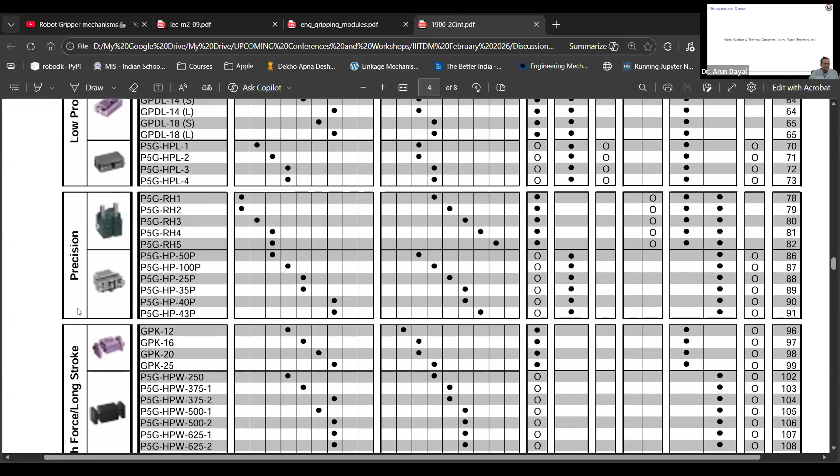Fingers you will have to attach. Low profile one, very compact, highly precise one, high force long stroke—you have to wide open, hold a pressure cooker, right? So you have a long stroke. And maybe you have a three jaw finger, so for three jaw finger again stroke, gripping force, those things were important. This is three jaw, this is all two jaw. So this is kind of gripper selection you can do based on these few parameters, right?

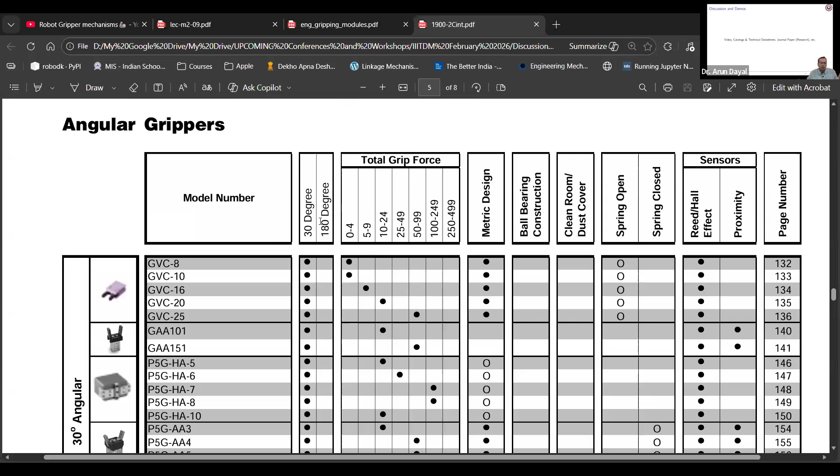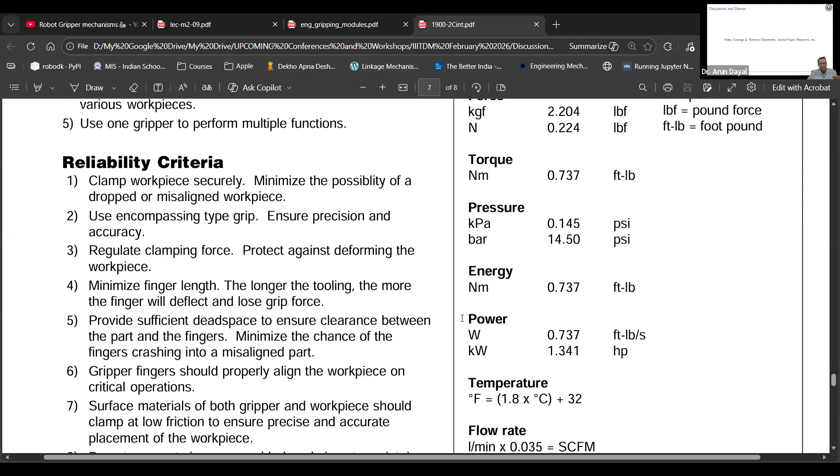So these are a few parameters you see, and then you definitely have some small numericals that can be done here. What could be the length of my gripping finger to hold an object of this length? What should be my gripping force, what should be the gripping torque, how much torque it generates? So those numericals are there, and some solutions are given here which will help you select a gripper, okay?

So this is for the Parker gripper you saw, and this is for Schunk, which is again very popular in the industry, okay? So these are various kinds, nomenclature is there: three-fingered universal gripper, three-fingered gripper for small components, two-finger universal, parallel grippers, long stroke grippers, universal angular radial grippers. So there are various kinds it makes, and it is in the respective page number you will find, you can do that. Again similar parameters are there—stroke per finger, gripping force and torque, okay.

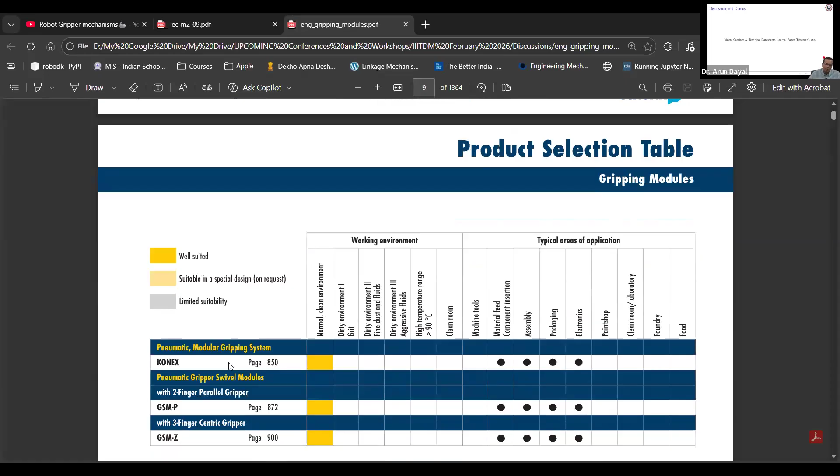So that is what is very important: opening angle in case of angular gripper, gripping moment and torque in case of angular gripper, right? So these are the parameters, and based on that you come to a model part number and then you order for that.

So this is what I call an engineer's way of using a gripper, rather than just if you go to a market to buy anything, you definitely need to tell some specs, right? In order to put in a tender also, maybe you require to specify those specs. It is better you go through this data sheet thoroughly before you order something.

If you are buying a robot, by default it doesn't come with a gripper. So to order a robot, maybe you have to specify the kind of gripper which is more useful throughout the tenure of the robot, because grippers nowadays are very expensive—at least industrial grippers, 1 or 2 lakh in addition to what the robot costs. So it is better to plan an order so that it serves maximum of your task, right? That is the reason.

Okay, so this was the 2 data sheets that I have discussed. Maybe I will come to this now. I will stop the share, I will share once again.

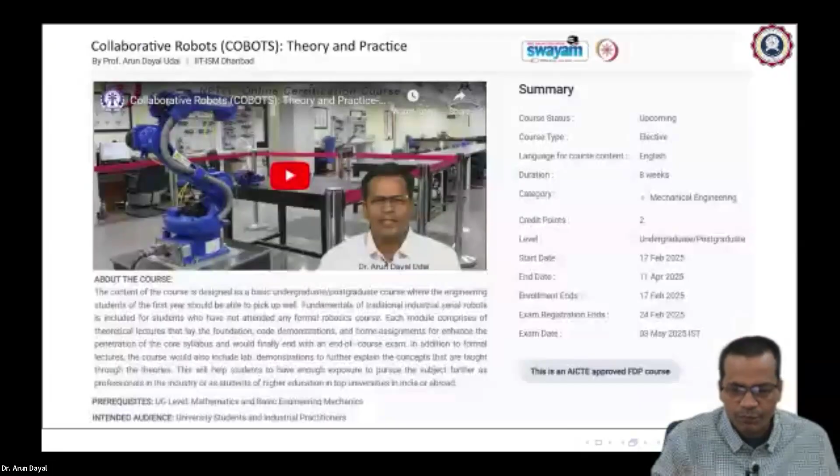So now let me come to, I have discussed the technical data sheet, maybe 1 or 2 journal papers, 1 or 2 of my research that I want to put here. So far you have seen all the robots hold using an end effector, right? But it can happen that you hold like a human. A monkey can hang from the tree just by using his tail, is it not? Have you seen it? Monkey hanging upside down from a tree using its tail—it is not using its hand or legs, right? It is not using its limbs, rather it is using one of the body appendages which is known as tail.

Similarly, you can hold your cell phone like this. Is it not a gripping? Tell me, is it not a gripping? You do steering, you steer your car at the—don't do it, but okay, so you can hold your mobile like this. Any body appendage can be used. That is what human being is made for. You can fold a bed sheet just by holding like this. Can you see me thoroughly? You can hold with your teeth and you can fold it like this. Instead of using your dexterous fingers, you can always use your teeth, you can use your chin, you can use your neck.

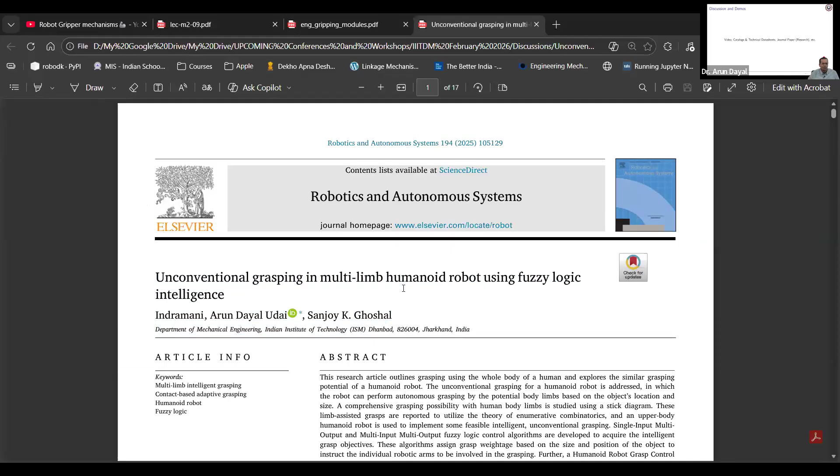So what I have done, see this kind of folding. Do you think you need grippers or fingers to do this job? You don't need it, right? You can hold just in between your elbow and your arm. This is one way, holding a baby between both of your arms and the torso. Holding a helmet between arm and the flank. You are doing it, right? You are doing it.

So this is one workout that I have done here. How many different ways can one hold an object? Head, shoulder, left upper arm, right upper arm, left forearm, right forearm, torso, thorax, left upper leg, right upper leg. I have classified all the appendages and their subsections and created a table of what gripping can be done and what cannot, feasible or not feasible, as normally done by humans.

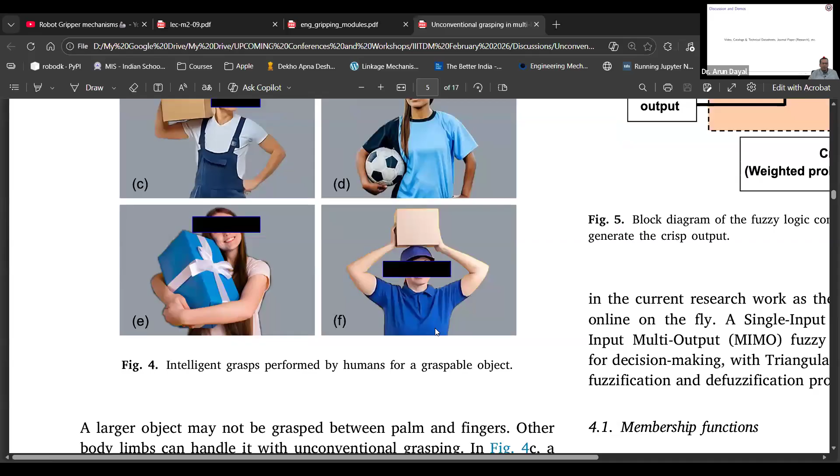I made algorithms to hold objects in these kinds of ways. Holding like this, holding over shoulder and head, holding it between your thighs, different ways you can hold things, not necessarily using your fingers or palm or hand altogether. Got it? So that is the takeaway of this paper, recently published in 2025, last year, around October.

This is a very good job that you can follow. You can continue your research from this place, or maybe something in soft gripping. These are my research directions that I can suggest while you want to do any kind of research. There is one more publication that can do assembly tasks, not just pure positioning. That's another publication, I will just show it.

This is another publication. Here, what I have done is gripped using a two-fingered gripper. Let me share this now. Okay, so this is a two-fingered gripper, held in the cobot. This is a KUKA iiwa robot. I am holding it, but instead of applying gripping force and position control trajectory to search for the hole, I have used force control trajectory to locate the hole.

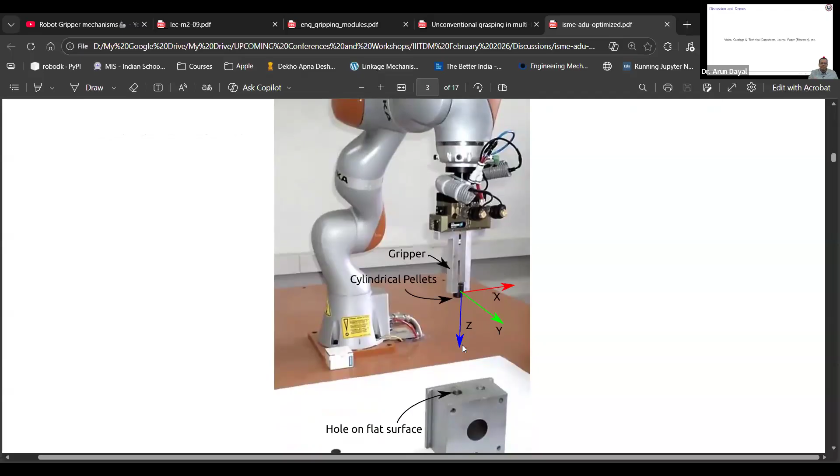Instead of the way we normally do insertion in a peg-in-hole task, how do we insert a key inside a hole? Do we see it thoroughly? You can do it even if your vehicle is standing in the dark. What do you do? You just blindly go near the keyhole, move around and push it. What are you doing? You are applying force control, not position control. You don't know the position, but you know the forces which guide you to that hole, right?

So constrained force-guided motion is used to insert into the hole. That kind of gripping assist is used to insert this pellet inside the hole. That is what is demonstrated in this paper using a cobot, and this was quite a good paper that I have done. We have recently worked on gripping and assembling tasks using a parallel and serial hybrid structure to do peg-in-hole tasks, handling precise manipulation and long-distance manipulation using serial structures. So this paper is all about that.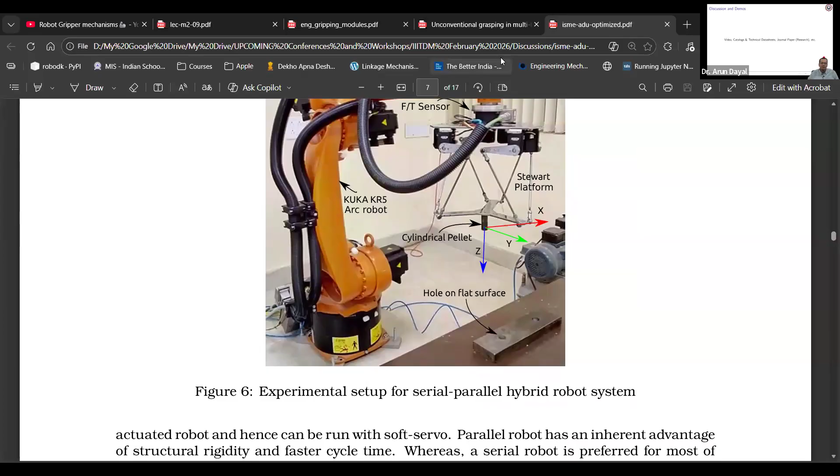These are a few directions that I have followed. You personally can take this up, or maybe soft gripping, which is very popular. I wanted to show you a video here. Let me see if it is here.

Which is essentially a different approach altogether to do this kind of job, maybe a research direction. I am not sure where I will get it, but I will share it.

So this is a course on cobots, my upcoming course starting mid-February, on collaborative robots, an NPTEL course. Why am I discussing this here? Because this course talks about compliance. Why is compliance required? Because you want to hold something which is soft.

I have one publication on soft servoing techniques, on how to create a drive that can control force, because you have to control gripping force. You want to hold an egg, or a sofa, or something of variable shape, so it has to adapt to the surface. That kind of control circuitry is discussed in this course, compliant grippers, compliant systems. I'll talk about all this in the course.

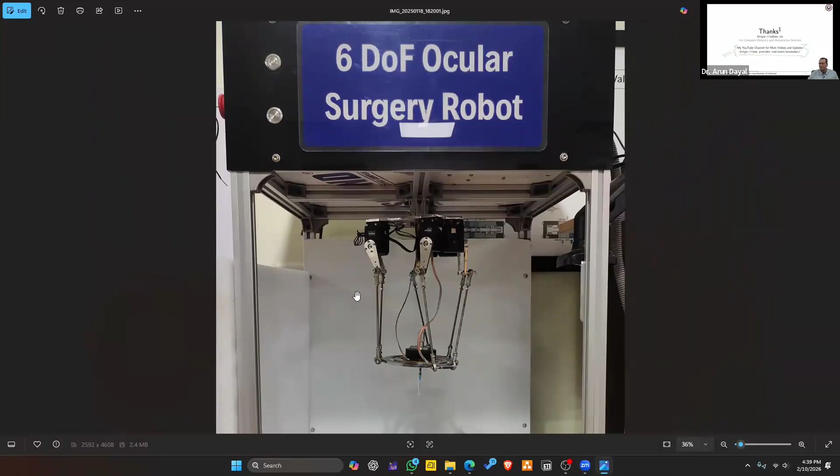This is an ocular robot system used for surgery, a parallel robot, 6-RSS kind, with revolute joints on top and spherical joints on the two ends. This is an ocular drug delivery robot. We got the Gandhian Young Technological Innovation Award for this, two patents, a few publications and one PhD, done by my PhD student in our lab. This is a 6 plus 1 degree of freedom ocular robot system.

Similar work here: this is a standard Yaskawa robot, but we integrated it with our PC based system for research as well as UG and PG teaching. We use this 6-DOF robot with a magnetorheological finishing arrangement on top as an end effector tool to do polishing. This is current ongoing research by one of my PhD students, myself and Professor Jafar.

Drones are always a favorite of UG students, though I don't do much research on this, it's just for UG fun. This is a modular manufacturing system in our lab, showing pneumatic arms and conveyor systems, with various sensor integration through different PLCs at different stages, just like an industrial automation system.

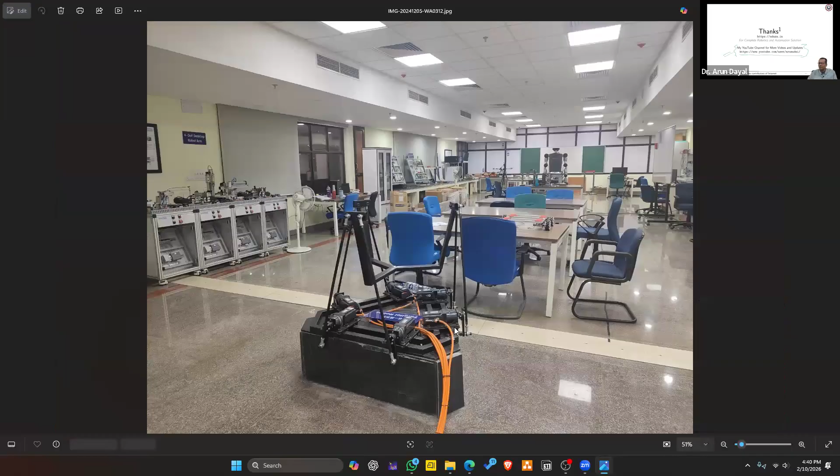My lab looks like this, with industrial automation setup, actuator training setup, sensor training setup, ocular robot setup, drone systems, and a humanoid here. Our institute is the only institute in India which has an industrial level humanoid robot, and this robot is worth around 2 crores. It has 7 degrees of freedom in the arm, both cobots, and the head has got 2 degrees of freedom as well.

This is a 6RSS platform built by my student only, it's a moving chair, I'll show you a video also. So this is how my lab looks like. It is state of the art, best in, if not best, at least in Eastern India I could say. It has all sorts of things. So if you are interested to do research, come as an intern or send your student as an intern, you are welcome.

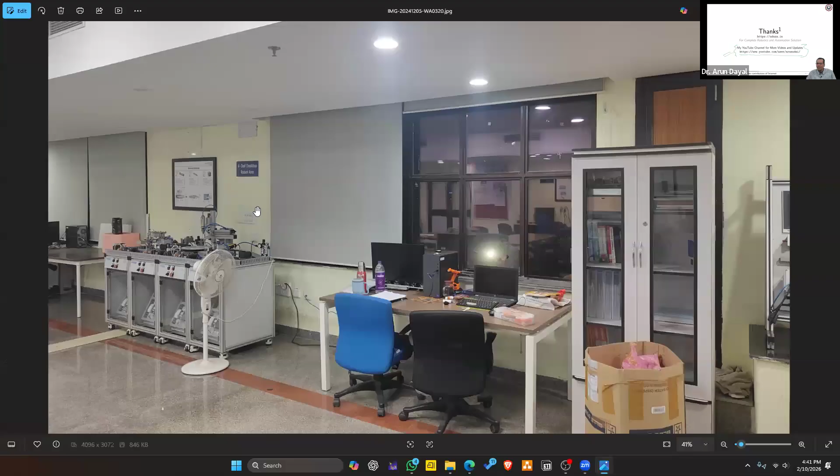This is pneumatic, electro-pneumatics and PLC training system that is there, automation system. This is my student's desk. How does it look like? Internal library we have. This is actuator training setup. In this setup we teach students, this is a custom setup made by us only. So this is DC motor, BLDC motor, stepper motor, industrial synchronous, AC servo motor, induction motor.

All 5 types of motors can be integrated to a PC based control system through EtherCAT. So all is industrial here. You see all the data acquisition system and controllers and IOs are industrial EtherCAT based system. This is industrial PC, industrial HMI. So the whole system, we don't use Arduino in our lab, we don't use NI DAQ, we don't use MATLAB. What we use is open-ended systems like Python, C, C++ to do all sorts of programming, and all the input-output systems are all industrial.

Same with sensors, different types of, we have a bucket full of sensors, all kinds of sensors are here, like you see this is force sensor, temperature sensor, LVDT, proximity, right? So all sensor integration is done and it can be pushed into the IoT based system. You have a small HMI here again with industrial PC, right? So these are sensor and actuator training setups, fully custom built in our institute.

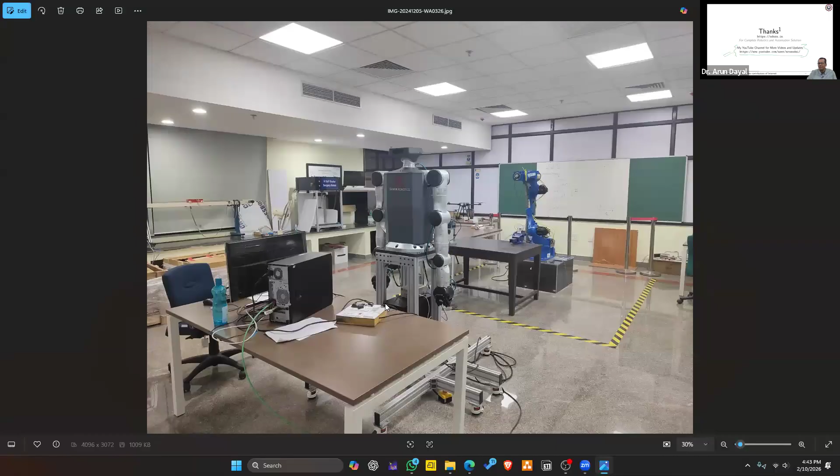So we have made so many robots, apart from a few we bought like Yaskawa. Even this one is a custom built robot. This humanoid is a custom built robot from DRDO, Svaya Robotics and IIT Dhanbad. Okay, so it is it, so this is what we are doing in our lab. So feel free to come here, you are invited, right? So this is how my lab looks like.

And maybe yes, and my team. And that's my team here. If you can see this, all our UG, PG students are here, and all our team, right? So this is a culture here, families do come to the lab, we do party together, right?

I can show maybe a small video again to show what goes on in our lab. I am left with few minutes, so I am showing this. Maybe that can attract few PhD students, no? Yes, so this is it.

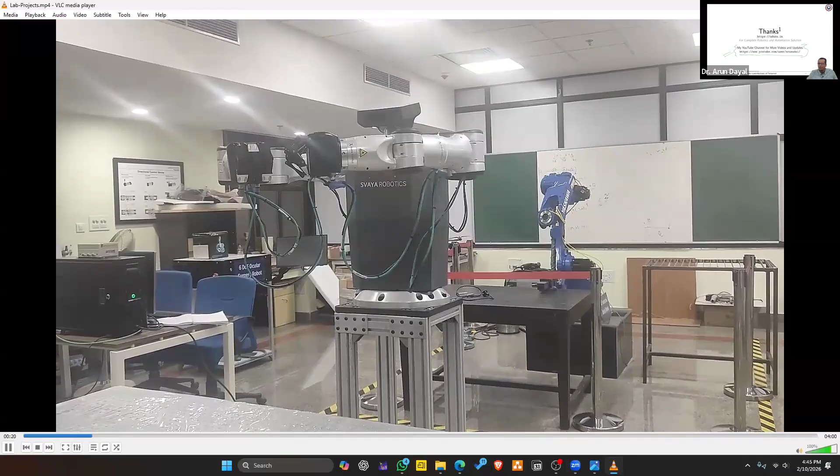So this is a humanoid robot we have. So this head is moving, it has a 3D sensor, it creates a point cloud, RGBD camera, industrial grade. This is the arm, left arm, right arm with grippers, robotic 3-fingered gripper, right? So this is our humanoid robot, half humanoid you can say, right? So you can do all sorts of research tasks.

We are given this one to do DRDO research kind of work. This is the 6RSS platform, revolute spherical 6 degree of freedom parallel manipulator used for simulators, built by my PhD student Himanshu, right? It can do all sorts of motion again.

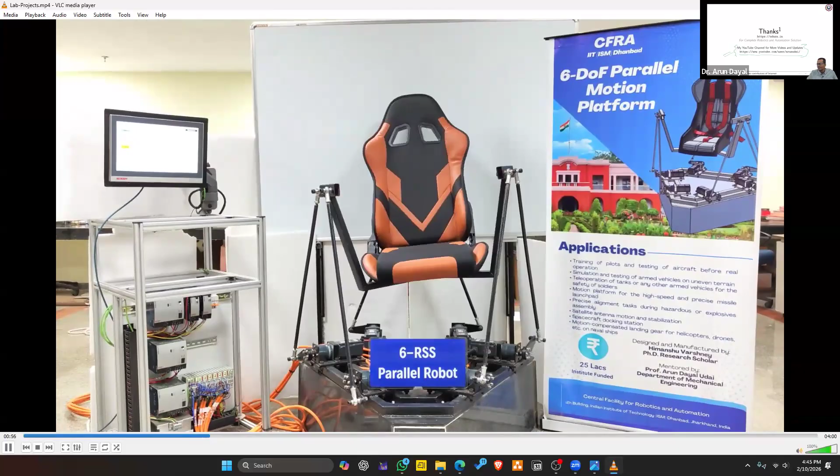So this is a kind of quadruped we have made in our lab. Again, it was part of our research for one of my projects, right? Quadruped robot, humanoid and self-balancing robot we have done. So these are the researches that we do normally in our lab.

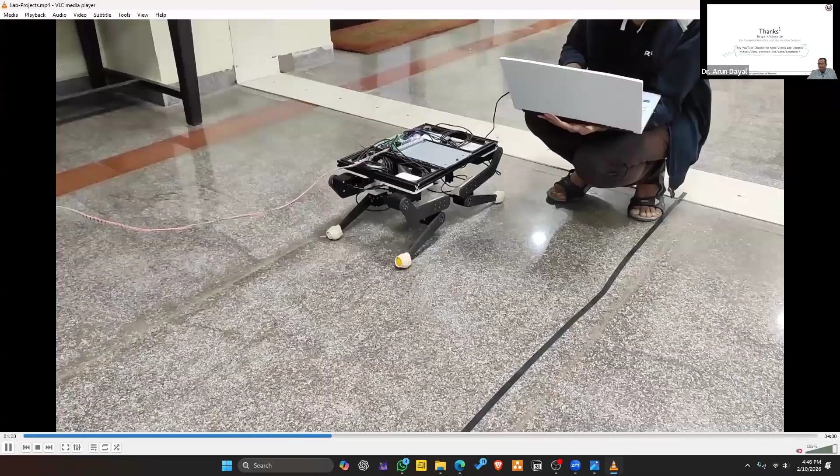Slow static walking, earlier was dynamic walking. It has to go under the table.

Students enjoy doing a few things actually. These are for fun only. So this project is over now.

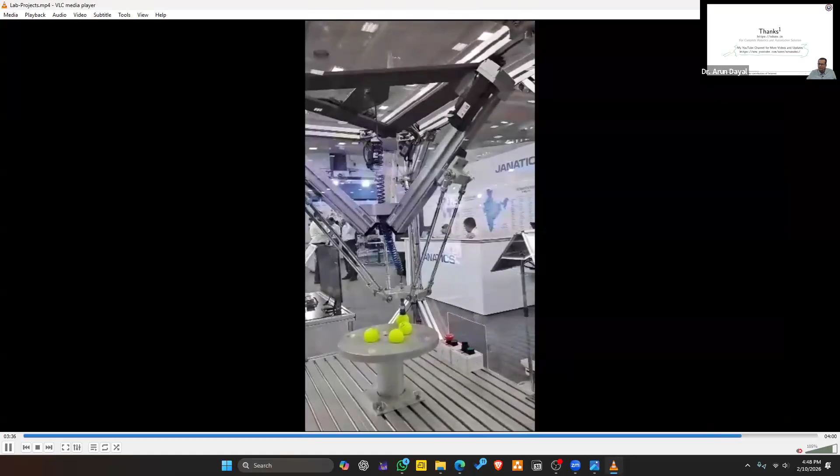Vacuum is created by Bernoulli's principle. That is what Bernoulli's principle was, that I was telling you about. Vacuum is created by this. Let me just come to that.

How does that work? Basically, if you flow through a throttle, you create a partial vacuum at the center, at the high flow area, and that is what is used to create this vacuum. So vacuum is created using compressed air. Got it? This is vacuum created using partial vacuum through compressed air.

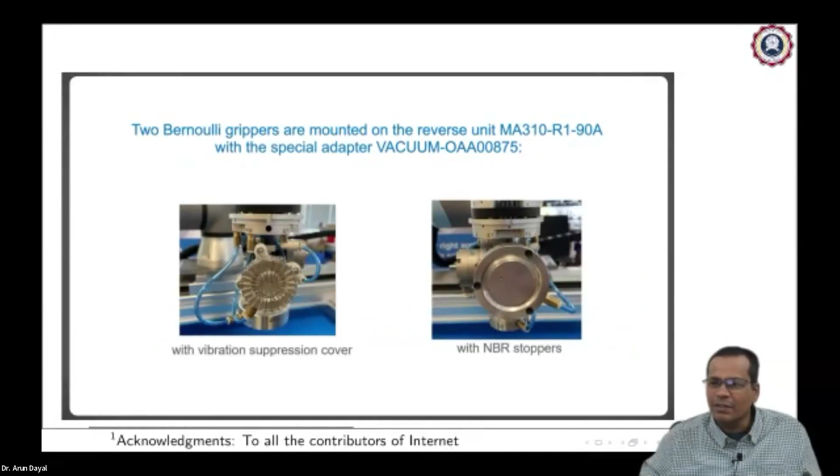You see this one I was showing - this is a vacuum created by using compressed air. It has a silencer and it can hold anything, like this paper. It has a tool changer that you can see, so multiple grippers of different sizes are there to hold different things.

Compressed air is used to create vacuum. Basically a venturi is there to create a vacuum, but it is quite noisy, so you need a silencer at the end sometimes. I won't go further here. This was just something I missed, so I showed it.

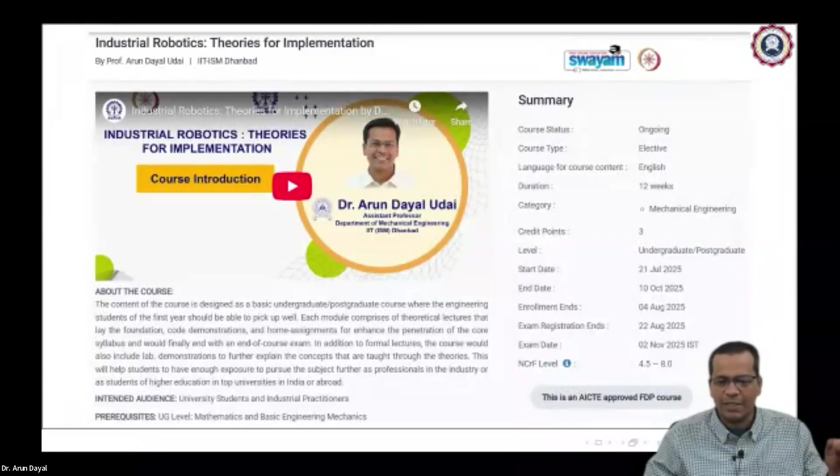So that is our first principle. It's an industrial robotics lab, and that is all my course is also about. My cobot course as well as industrial robotics course, it is all about that. I would suggest you go through these two courses that I have mentioned. This one is going to start just this week, February 15th it will start. So that is the collaborative robot course, no? This one. So you can suggest your students take up this course. It is very good, so all the intricacies are covered.